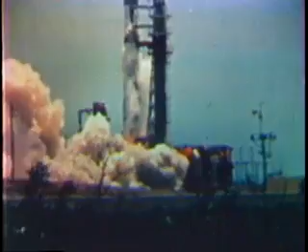and this is ours? A better design on the drawing board is no immediate effective countermeasure. Our birds must fly when they're required to. The high complexity of modern-day weapon systems demands the closest possible approach to absolute reliability. There is no second chance. So there must be absolute process control during system design and system manufacture.

Are these more imports from other lands? Or are they more exports of our own manufacture? If we are to compete successfully, both at home and abroad, our economy must expand, our industry modernize. To remain strong, to remain free, to enjoy the good life.

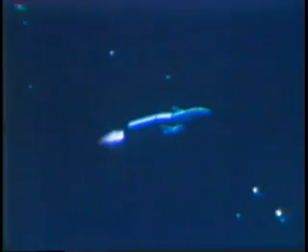We also need newer and better aerospace vehicles, and we need them fast. We need newer and better weapons, and we need to get them from design concept and into operation more quickly and at a reasonable cost. We need new and better products for civilian consumption. Products which can compete with foreign goods here at home or in foreign markets.

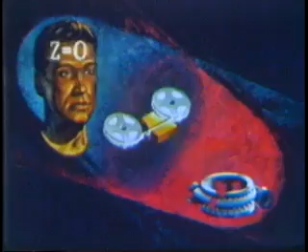We must have modern manufacturing, as modern as we can make it. Modern manufacturing is a command performance. Command performance. Well, we don't usually have enough command of our process to get the performance we want.

Of course, it takes a lot of time to get from a set of new drawings to a finished product. But time is something we don't always have. The period from development to product is growing shorter and shorter. As someone said, time has collapsed. Now let's try this process.

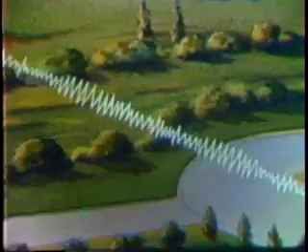Say the component is a Type 20K, and we're changing it with a modification of the Type XR. Now, suppose all you needed to do was to say into a transmitter, 3 Type 20K modification XR. Orders to the plant. That's right. You merely define what you want, and in a fraction of the time it would take conventionally, your product's manufactured, assembled, and ready to ship. And that component we were talking about is only one of many making up the complete product.

How could you do all that so quickly? Not only so quickly, but in much less space. You'd need a much larger plant to do this by conventional methods. Oh, this is not conventional. Not at all. This is a modern plant. Really modern. What do you mean by that?

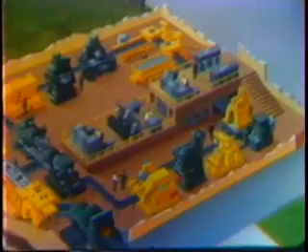When you give your command over the mic, which may be in the plant or remote, almost anywhere, the information feeds into a voice converter, which translates your language into a language which the computer can understand. The computer analyzes your request, then draws on its store of information to produce a series of tapes, which feed into a production control center. This center not only controls each of the machines, but the flow of parts as well, acting as a scheduling unit.

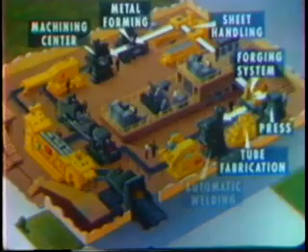Now all of the manufacturing units are actuated. Basic shapes are routed to production centers for complete processing. Completed components are then checked automatically by inspection machines, then sent on to a robot subassembler. Subassemblies proceed on to a robot for final assembly, and then on to shipping. That's what I call command performance.

Of course, I've oversimplified the process a bit. You mean you've been putting me on, don't you? Not exactly. This is not as fantastic as you might think. Take the computer, for example. Computers are fairly common today, although we still must talk to them with cards or tape rather than directly. But they're getting more sophisticated all the time. And from this information, a control tape is produced. Control tape for what? To control a manufacturing process.

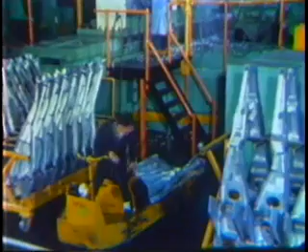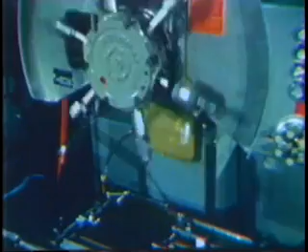Now, these machines are in existence today. Inexpensive tape-controlled drill presses. The more sophisticated turret drill presses. Vertical turret lathes, capable of high accuracy contouring.

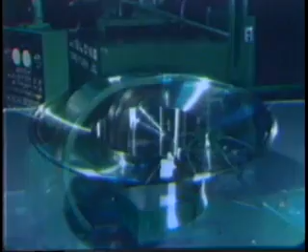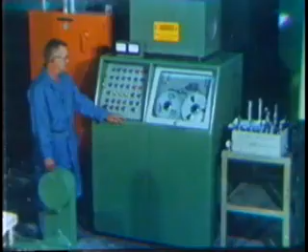Tape-controlled engine lathes. With equally exacting contouring and thread cutting capabilities. High-precision multi-axis profiling mills. Machining centers that change tools, mill, drill, bore, ream, and tap.

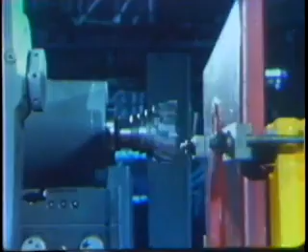In many cases, they can complete the entire manufacturing process in just one setting. Fully capable of doing that job of yours we were talking about, and even more. Now, what different tools would you need for this piece? 6 different milling cutters, 4 sizes of drills, 4 reamers, 6 taps, and 4 boring bars.

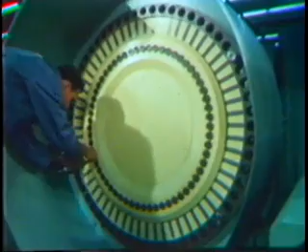And where you needed 8 machines to use these tools, the whole batch is loaded into a magazine for use by this one machine. All the instructions to the machine are on a punched tape. The intelligence on the tape tells the machine exactly what to do.

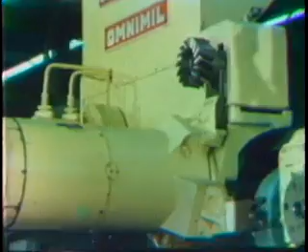This is called numerical control, which is one of the means of using mathematical definitions to furnish intelligence a machine can understand. There are many methods of accomplishing this. However it's done, it certainly shortens the chain of command and greatly reduces the opportunities for a breakdown in communications.

There's the same casting you would have started with in your conventional shop. But notice there's only clamps required. The machine itself will even make its fixtures from tape control if necessary. And there you are. All the machining done in only 45 hours.

How long would it have taken in your shop? Oh, about 300 hours to machine and 26 weeks of lead time. After you tooled up. Remember, the lead time here was only 2 weeks. If you need a second or third or fourth piece, you get them in a matter of hours. All exactly alike. Now that's performance.

What happened to automatic inspection you were dreaming about? That was no dream. They're already in existence, too. And research and development are making them better all the time. On this machine, a probe is guided by a tape similar to the one used in manufacturing the part. The measurements are recorded for inspection and record.

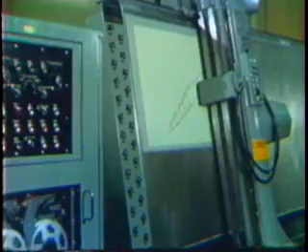But you still need an original detailed drawing, don't you? Not necessarily, but if you want one, it can be made from a numerical control tape too, operating a drafting machine. Often the drawing can be made at the same time the part is being made, using instructions from the same tape.

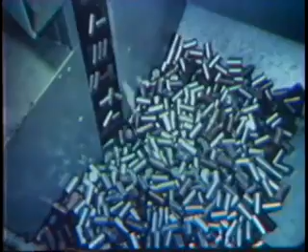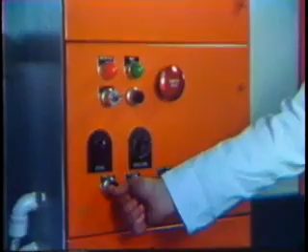I noticed the loading and removal from the machine is still conventional. But it needn't be. You'll find automatic loaders and transfer mechanisms on a lot of production lines today. This automatic material handler remembers every sheet in its inventory and will deliver it undamaged in seconds.

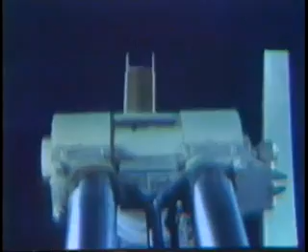This robot manipulator will perform a variety of handling operations. It can be easily taught to load, unload, and assemble parts because of its electronic brain. So you see, we have practically all the elements of our plant of the future. It's just a matter of time before someone puts them all together to make the dream a reality.

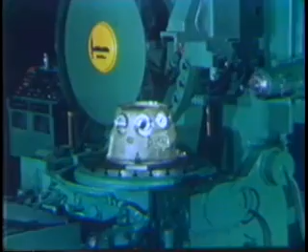I don't know that anyone has ever produced a crystal ball on one of these machines, but you don't need to be a fortune teller to realize that our success in aerospace depends upon our national capability to produce combat-ready systems with complete reliability. We must produce first, best, and at the lowest possible costs, which are consistent with reliability and reproducibility.

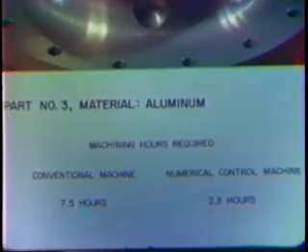This means that we must be able to manufacture from all sorts of new and exotic materials. It means we must be able to produce structural members with a high degree of configuration complexity. It means we must produce with greater dimensional control. Some large rocket engine inducers, for example, can't be produced to design concept by conventional manufacturing methods. It means that we must produce components which have structural integrity.

This aircraft bulkhead was built up of over 90 different parts, requiring more than 1,000 rivets and high-strength fasteners. You can imagine how long it took to tool, machine, and assemble all these parts. And you can imagine the possible human error involved. The more modern one-piece bulkheads have greater structural integrity, but they were still expensive.

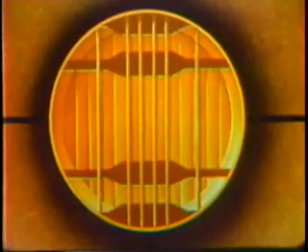These one-piece bulkheads were first produced by conventional methods, using specially designed tracer-controlled rotary tables with many coordinated overlay templates and tracer patterns. It took 160 hours of machining time to produce one bulkhead, and at considerable cost.

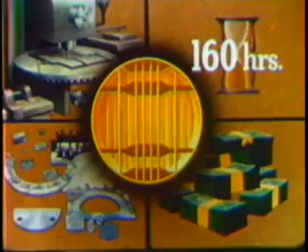The part is now programmed on a numerically controlled skin mill to machine 2 at a time. This requires only 2 sets of vacuum chucks and 9 reels of tape. The time reduced to only 9 hours per part, and the cost reduced by 80%. In addition, there's a 25% reduction in weight. Command performance? I'll say. But you can best get it with numerically controlled machines.

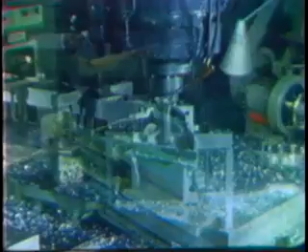Can this type of control be applied to other types of machines? Certainly. There are machines that automatically position and punch all types of panels. Machines which build up rocket motor cases by the controlled winding of glass filament.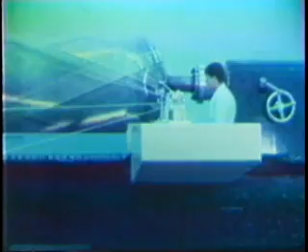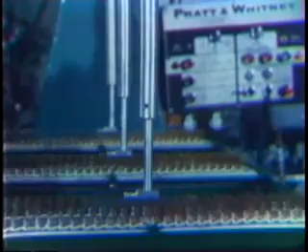Machines that position connector panels for wiring. Machines that position and mate the wiring connections on assembled electrical panels.

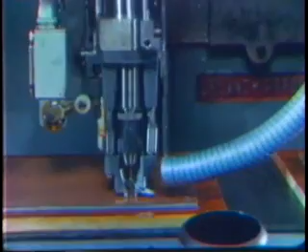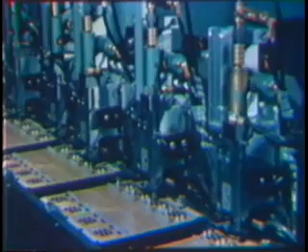Machines for drilling printed circuit boards. Machines for inserting the components in these boards. Machines for spot welding, which saves 72% in labor costs. This machine has proved invaluable in spot welding fuselage sections.

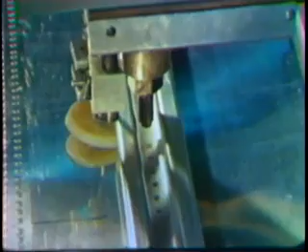The more complex fusion welding also can be performed by numerical control. The tape not only controls the positioning and movement of the arc, but also the welding factors, gas flow, current, and the like. In guiding the arc, the control permits blind welding down through one structural member to fuse it with a hidden member below. The result? A stronger weld, a member with more structural integrity. A more reliable weapon system.

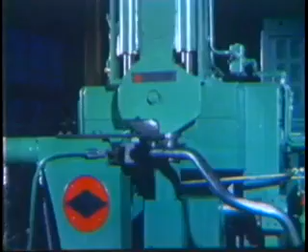Tubes can be bent by numerical control also. Tailpipes that fit any car precisely. Or the miles of plumbing used in modern missiles, and all without the need for separate jigs and setup time.

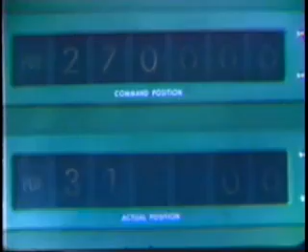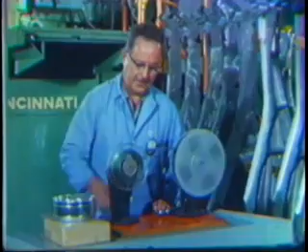By far the most versatile and flexible are the numerically controlled machines. For one-piece or production runs, they're the answer to involved machining operations. And for machine control, you can't beat instructions which are fixed and not subject to human error or emotion. Why, this tape could be sent anywhere in the world to a similar numerically controlled machine. And it would produce a part interchangeable with the one produced here from this tape.

May we backtrack a moment? Surely. Just how do the instructions get to the machine in the first place? Well, let's begin with your own sketch of some part. Make it complicated. We'll hog it out of a block. Let's use master dimensioning. Okay. There you are, with all the essential dimensions, but scarcely something a machinist could work from. That took you about an hour.

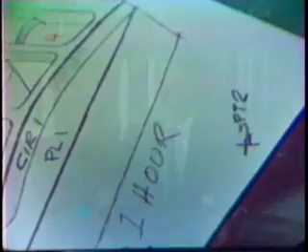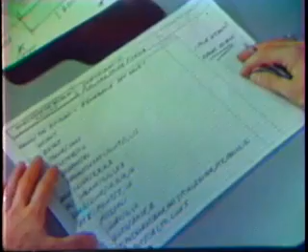Now, we'll take this to a programmer as the next step in tape preparation. And there's the program. Now, let's see, that took about an hour and 45 minutes. Add that to the hour for the sketch. And the 5 minutes it took us to get here. And the total's 2 hours and 50 minutes. Those words on there look sort of familiar, but different. That's right. They're a kind of pidgin English.

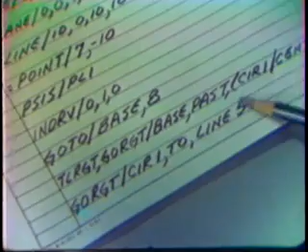This information will command the tool to start from the point called set point, which is defined as the point with coordinates 1, 1, 1. With the tool on the right, it is instructed to go right along the line base. At this point in the operation, the tool is sent forward to start cutting a previously defined circle about a previously defined point 2. Now here's that circle on the sketch. You can see it's a language that you can readily understand and use, and one the computer can understand too.

As of now, conventional computers do not accept oral commands, so the instructions are put on punched cards or tape. We're moving right along. Just 10 minutes for that job, for a total of about 3 hours. Now the computer operator gives the commands to the computer, which translates them into machine language. And here are the commands we'll take to the machine. We've now spent only 3 hours and 20 minutes. That's really chopping down lead time, isn't it? Yes. I expect it would have taken me weeks to design and tool for this job. It might be a good idea to think about modernizing then.

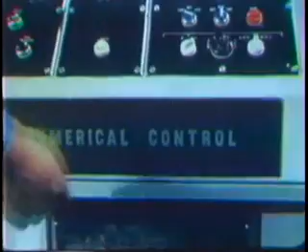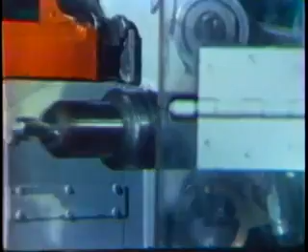This whole system's called numerical control? Well, the machines are operated by numerical control. When you talk to a computer, though, well, that's a little higher order of communication. I suppose you might call it symbolic control at that point. And look, your part is already being manufactured. There's your part. Just 4 hours after you started making the sketch. You want to check it out? You bet. Amazing.

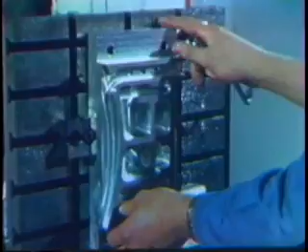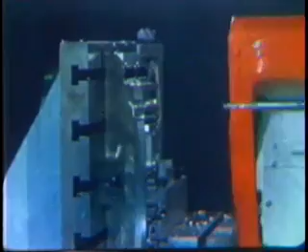Absolutely amazing. You see, what happened was that the machine did what machines can do best, and humans did what humans can do best. You did the designing, the creating. The programmer planned the process from his knowledge of machining and the particular machine. And being human, you were able to start a chain of command to the machine, a very short and very exact chain. As a result, you obtained a superior performance from the machine, far better than by conventional methods. And you get the same performance time after time, because the commands cannot change. And that's why you call it command performance.

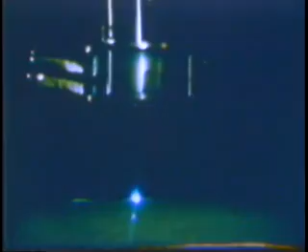That's right. Well, what about the actual joining, forming, or removal of metal? What's new along these lines? Plenty. Electron beam welding, for one thing. Here, even two dissimilar metals can be permanently fused together by the high-velocity electron bombardment in its vacuum chamber. Electrolytic machining, for another. The cooling holes in this turbine blade were eroded to exacting tolerances by this stem drill. The hollow drill electrodes never touch the material, so they need not be reset or replaced.

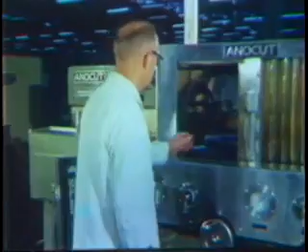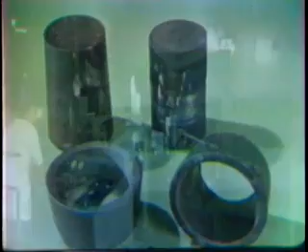Just the opposite of electroplating, huh? Correct. This finished turbine bucket was shaped from high-temperature material. And here are the shaped electrodes that were used to do it. The process replaces a dozen conventional machines and produces a yearly savings of about 80%. When subjected to enough pressure, metals become plastic and are easily formed. This vertical shear former produces turbine compressor shafts at a savings of $1,500 per part.

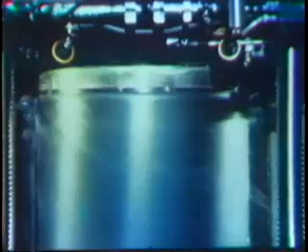Similar machines will turn out shapes such as cylinders, cones, and rocket motor cases from practically any metal, including many of the exotic alloys. Or suppose your product needs formed parts, like this. This machine pre-stresses metal to its yield point and has a tension control system, so that forming is accomplished with high accuracy.

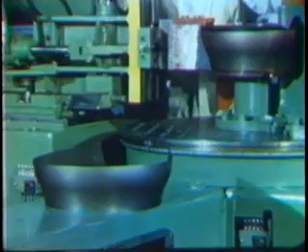This jet engine part was formed from Rene 41 in just 2 minutes, and the savings over conventional methods is 80%. A similar type of process will give you savings of up to 90% on drawn components like this, and permits the use of inexpensive dies. This blank holder, adapted to a conventional press, pre-stresses the metal and makes it more flowable than plastic. By adjusting the stress, almost any metal can be formed using the same die.

Normally, 3 draws would be required to produce this part, with 270 hours of handwork for finishing. But here it is, produced in 1 stroke, holding its shape without springback, and maintaining that shape throughout subsequent welding. This hydroform turns out complex, shaped parts in seconds that formerly took hours to fabricate, assemble, and weld. The rubber bladder reduces tooling to only 1 inexpensive die.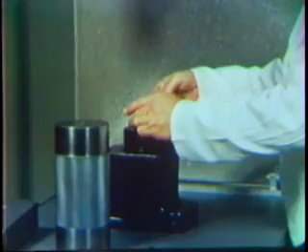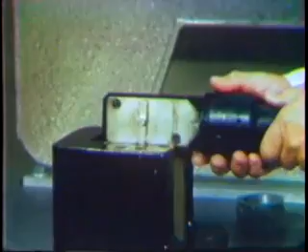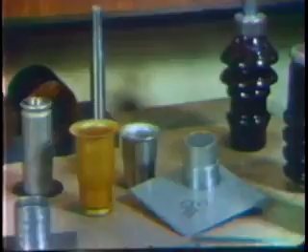Want more savings in forming metals? Perhaps electromagnetic metal forming is the answer. This process uses powerful magnetic fields to swage, expand, compress, coin, shear, and assemble conductive metals without mechanical contact with the work. This machine uses the explosive power of man-made lightning to form parts.

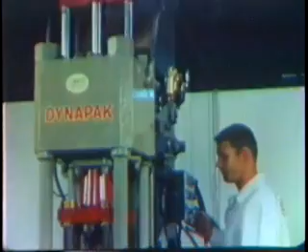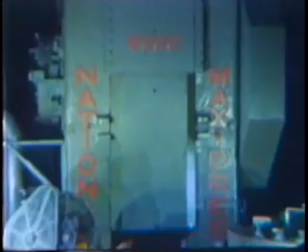What about forging? How about that? That's high energy rate forging. These machines will deliver a terrific amount of energy in a split second to forge such materials as tungsten or even cast iron, as well as the usual materials. High-tonnage mechanical presses also offer great savings in the production of precision forgings.

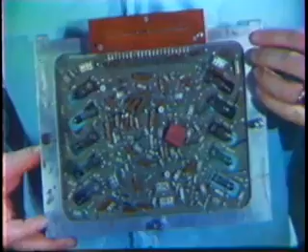For testing electronic systems, there's automatic testing equipment. Here's a complete checkout of a wiring harness. This machine checks missiles, computers, servo systems, and the like. The results of the tests can be recorded on a printed readout. And the savings? Well, in addition to the time, this piece of equipment replaces 150 separate pieces of test equipment required on many of the complicated checkouts.

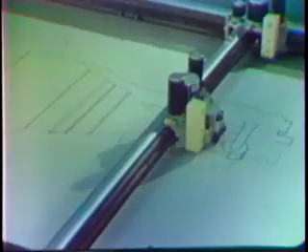Imagine what all these methods of modern manufacturing are going to do for the designers. And of course, you've seen only a few of the many new methods available today. No need for them to be limited by the restrictions of conventional manufacturing. They can now design a part to do the best job without compromise with manufacturing limitations.

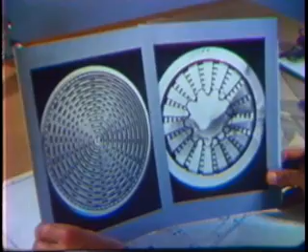I doubt if there's a machinist in the world who could have turned out this part and met the required specifications. Yet it's a vital part. And I know that without modern machining, it could never have been produced in time to get our missiles in operation on schedule. And believe me, we must be on schedule in these areas. You know, today in some sections of the world, the smelting of iron is still a primitive process.

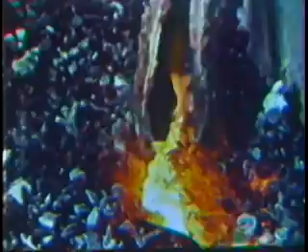And metal forming is equally crude. But some of our manufacturing processes still border on the primitive. While even the most modern standard machine tools are efficient for general applications, they will not readily accept the numerical control input so vital for the effective production of aerospace vehicles.

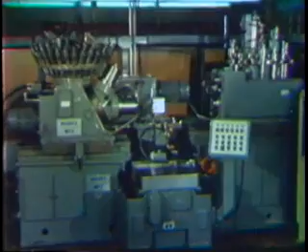We must modernize our manufacturing methods and go from design concept to finished product as quickly as possible. We must keep the wheels turning the best way we know how. We must apply what we know today and search for ever better methods. This is a command performance for the survival of industry and our country.

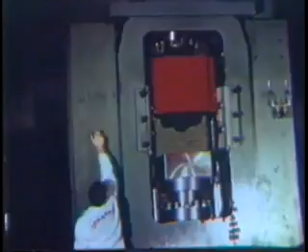Say, do you still have that clipboard? Sure. Here it is. Why? I want to write myself a note so I won't forget something. See? This is going to be a command performance, too.

Good idea. Because the Defense Department expects its contractors to maintain a modern base in their facilities. In keeping with the advance of aerospace technology, we need the productivity, reliability, and repeatability that only modern manufacturing can provide. And we all need the savings which can be effected in both time and money.